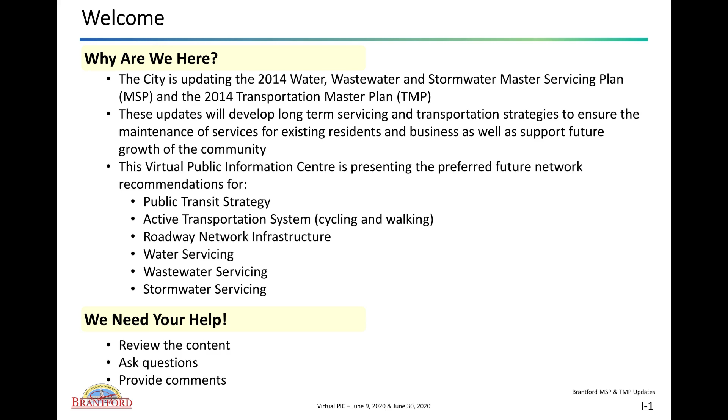The goal of the MSP is to develop a long-term servicing strategy for the City's water, wastewater, and stormwater infrastructure. The servicing strategies have been developed to ensure the maintenance of services for existing users and to support future growth. In response to the advice of public health officials to limit in-person gatherings due to COVID-19, this virtual PIC has been developed. Through this virtual PIC, you will be able to learn more about the Master Servicing Plan's preliminary preferred strategy for the water, wastewater, and stormwater infrastructure, and to provide comments on the Master Servicing Plan findings.

This presentation is the first in many steps of the virtual PIC process. The public is invited to submit questions to be answered by the Master Servicing Plan team. Questions submitted before the June 23rd deadline will be answered in a question and answer video posted on June 30th. Questions asked after June 23rd but before July 21st will be answered through a frequently asked questions document.

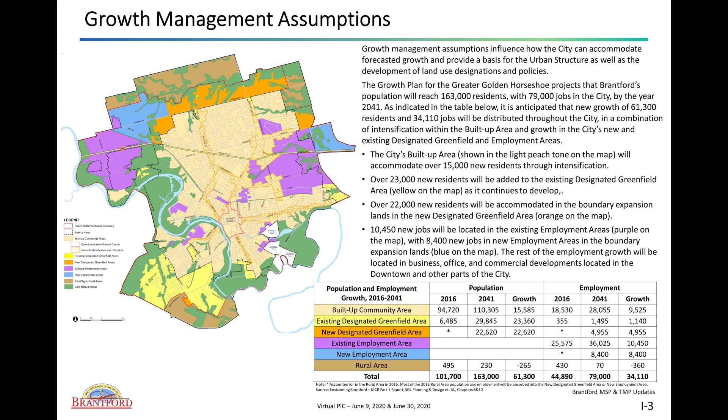The Master Servicing Strategy has been developed to ensure the maintenance of services for existing users as well as to support future growth. For the 2019 MSP, the servicing strategy focuses on supporting growth out to 2041. The Master Servicing Plan's population and employment projections are based on the City's official plan, which designates population and employment forecasts for new urban land uses and internal growth areas. The City's population is anticipated to grow by 61,300 people by 2041, for a total population of 163,000, while the City's employment is anticipated to grow by 34,110 jobs by 2041 for a total employment of 79,000.

The Master Servicing Plan update sets out to meet the requirements of the Municipal Engineers Association, or MEA, Class Environmental Assessment process, which involves the completion of Phase 1 and Phase 2 of the Class EA process for master plans. Phase 1 of the process focuses on identifying the problem and opportunities, and Phase 2 involves the identification and evaluation of alternative solutions. We are currently in the second phase.

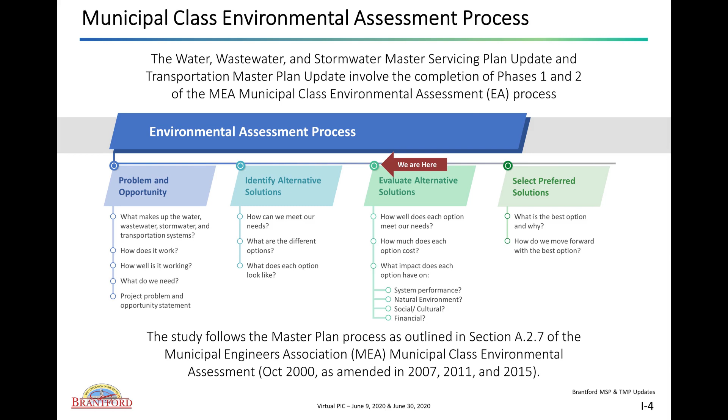Under Step 2, all servicing concepts that were carried forward were further developed into more detailed servicing alternatives. These alternatives were then evaluated using 4 major evaluation factors, including technical, environmental, social-cultural, and financial. Under each major evaluation factor, multiple criteria, as presented on the next slide, were reviewed and scored either high, shown as green, representing the most favorable conditions, medium, shown as orange, or low, shown as red, representing the least favorable conditions. Once all alternatives were evaluated, the preliminary preferred alternative was identified using the reasoned argument approach.

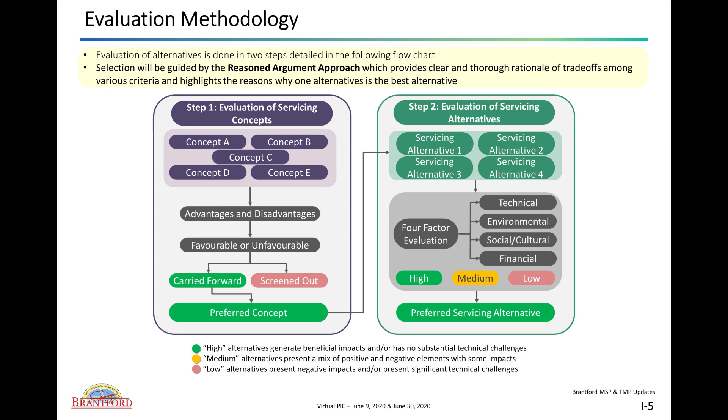The reasoned argument approach does not use an overall numeric scoring system, but focuses on identifying clear and thorough rationale of trade-offs among alternatives based on each alternative's anticipated impacts and benefits. The basis of this approach is to qualitatively evaluate the relative advantages, disadvantages, impacts, and benefits of each alternative.

As mentioned on the previous slide, each servicing alternative was subject to a four factor evaluation, which included technical factors, environmental factors, social-cultural factors, and financial factors. Under the environmental factors, the following criteria were considered: protects environmental features, protects wildlife and species at risk, minimizes climate change impacts. Under the financial factors, the following criteria were considered: capital and life cycle cost, operational and maintenance costs, aligns with approval and permitting process.

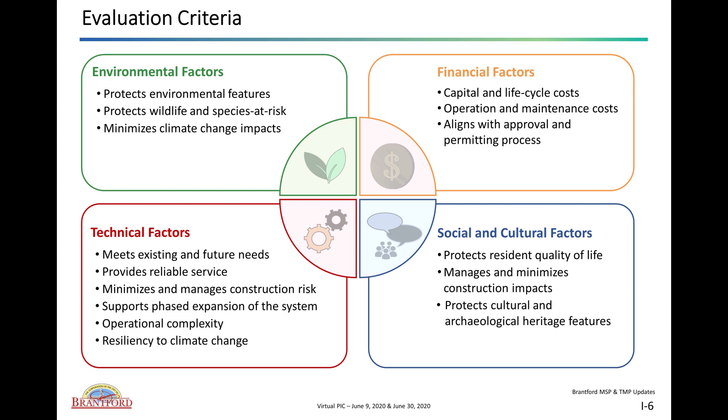Under the technical factors, the following criteria were considered: meets existing and future needs, provides reliable services, minimizes and manages construction risk, supports phased expansion of the system, operational complexity, and resiliency to climate change. Under social and cultural factors, the following criteria were considered: protects residents' quality of life, manages and minimizes construction impact, protects cultural and archaeological heritage features.

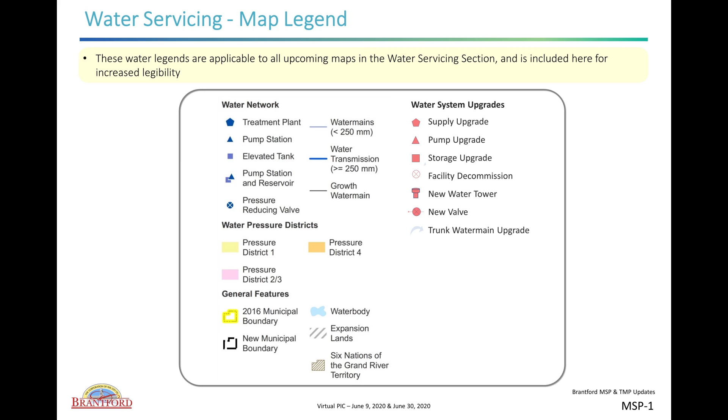Water for the city is supplied by the city's Holmedale water treatment plant, which receives and treats water from the Grand River. The city's water system is organized into 3 pressure districts: Pressure District 1, which generally includes the city's southwest, including the downtown area, Pressure District 2-3, which generally includes the city's east, and Pressure District 4, which generally includes the city's northwest.

Also shown on the figure are the future water service areas, which include the city's expansion lands to the north and east, and Tutela to the southwest. The Tutela area does have existing water servicing, but the system is currently connected to the County of Brant's Mount Pleasant water system. In the future, the Tutela water system will be connected to the City of Brantford's water system.

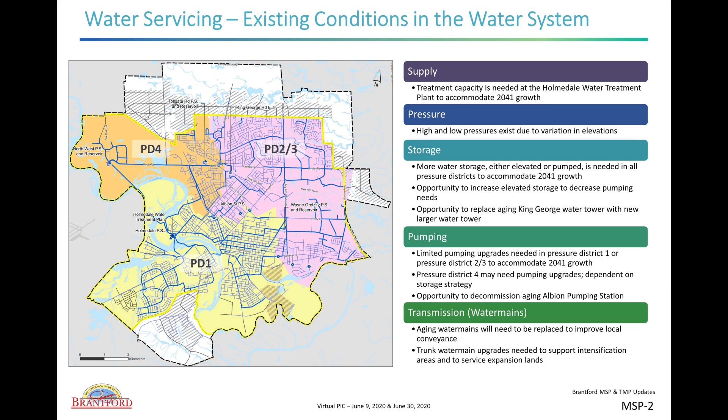To develop the water servicing concept and the preliminary preferred solution, a review of the existing water system was conducted to determine existing and future needs. This review identified supply, storage, pumping, transmission, and pressure opportunities and constraints. Key considerations include water treatment capacity to accommodate growth needs, water system pumping and storage capacity to accommodate growth needs, water main transmission capacity to support system pressure and flows, and extending of water servicing to expansion lands.

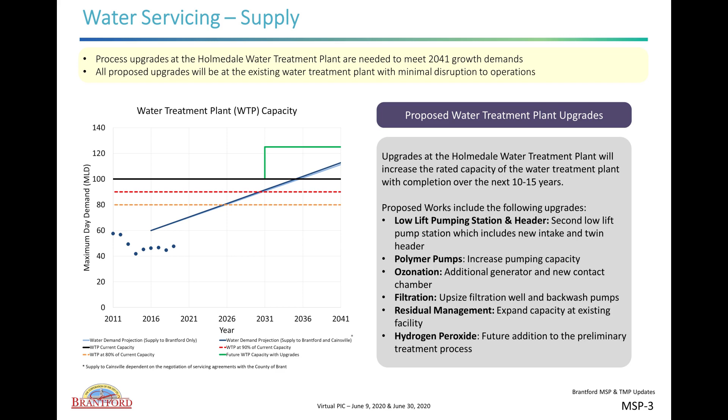Based on these capacity triggers, the treatment plant upgrade process will need to commence by 2025 with upgrades being completed by 2031. Water treatment plant upgrades are expected to consist primarily of optimization of major facility processes and expansion of minor and limiting processes. All the required upgrades will be completed within the existing property.

4 pressure district servicing concepts were presented at the previous PIC. Concept 1, shown on the far left, involves maintaining the current system pressure district boundaries. This concept was carried forward as it is easy to implement and potentially minimizes facility upgrade needs. Concept 2, shown second to the left, consists of splitting the existing Pressure District 2-3 into 2 new pressure districts, with the goal of improving system pressures and optimizing facility needs. This concept was screened out as it would be too difficult to implement and may complicate system operations unless additional new facilities are also constructed.

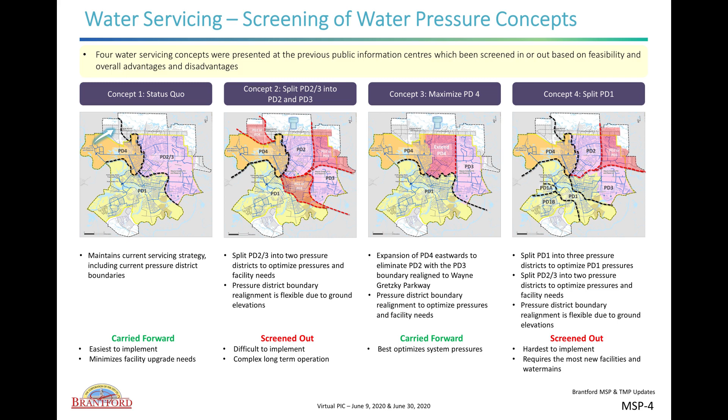Concept 3, shown second to the right, involves the expansion of Pressure District 4 eastwards to eliminate the existing Pressure District 2 and realign Pressure District 3. This concept was carried forward as it optimizes system pressures. Concept 4, shown on the far right, consists of a substantial reconfiguration of the existing pressure district boundaries with the objective of improving system pressures overall. This concept was screened out as it requires the most new facilities and water mains and is the hardest to implement. 2 pressure district boundary alternatives were carried forward and further evaluated.

Alternative 1, shown on the left, generally maintains the existing water system configuration and pressure district boundaries. Under this alternative, storage increases are needed to all 3 pressure districts to support growth needs. Further, pump station capacity increases are needed to support growth in Pressure District 2-3 and potentially in Pressure District 4.

Under Alternative 1, the Pressure District 2-3 storage needs provide an opportunity to decommission the existing King George tank and to construct a new elevated tower, allowing for the optimization of Pressure District 2-3's pressures and pump station operations. The location of the new elevated tower is shown conceptually on the figure to the left. However, the tower's final location will be determined through a future Schedule B environmental assessment.

Additionally, under Alternative 1, the Pressure District 2-3 pumping needs provide an opportunity to optimize the configuration and operation of the existing Wayne Gretzky and Tollgate pumping stations and allow for the decommissioning of the existing Albion pump station. Pump station upgrades are expected to be contained within the existing properties. The Pressure District 4 pumping upgrade needs and the Pressure District 1 storage needs are dependent on the preferred Pressure District 2-3 and Pressure District 4 storage strategies and are further reviewed and discussed on later slides.

Alternative 3, as shown on the right, consists of maximizing Pressure District 4 service area, with Pressure District 4 being extended eastwards to Wayne Gretzky, generally incorporating the limits of Pressure District 2. Under this alternative, the Wayne Gretzky, Tollgate, and Northwest pumping stations will all require upgrades to accommodate the new system configuration, and the Albion pump station and King George tank will be decommissioned.

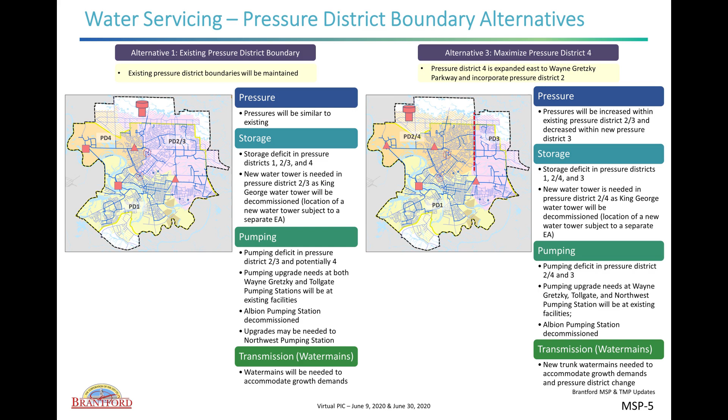Further, a new water tower will be needed to support Pressure District 2-4. The location of the new water tower is shown conceptually on the figure to the right, and the elevated tower's location will be determined through a future Schedule B environmental assessment. However, the water tower is anticipated to be located within Northwest employment lands. Further, the Pressure District 3 storage upgrade needs and the Pressure District 1 storage needs are dependent on the preferred Pressure District 4 storage strategy.

Alternative 1's key advantage is its simplified implementation process, allowing for phased expansion. Alternative 3 did have the advantage of generally improving system pressures. However, Alternative 3 is disadvantaged due to more complex implementation needs and does not support the phased expansion of the system, requiring many of the similar upgrade projects to be completed earlier than as compared to Alternative 1. Both alternatives have similar challenges related to land acquisition needs for the new water tower sites.

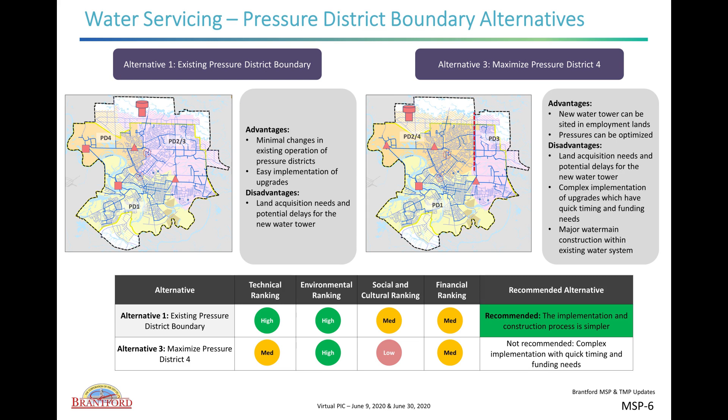Based on the preliminary preferred water pressure district boundaries, two water storage strategies were identified to address Pressure District 1 growth needs. Alternative 1, shown on the left, would consist of constructing a new ground-level reservoir at the Holmedale water treatment plant. Alternative 2, shown on the right, would consist of enlarging the new Pressure District 2-3 elevated tank to accommodate the additional Pressure District 1 needs, and to facilitate the future transfer of water from Pressure District 2-3 to Pressure District 1 through improved zone boundaries.

Alternative 2 provides the greatest flexibility in phasing of future expansion projects. The new Pressure District 2-3 elevated tank will need to consider future servicing needs for the remaining lands within the city's municipal boundary. This would trigger the need to design and construct the new elevated tower to support these post-2041 needs due to the tower's 50 to 100 year expected life. By leveraging the surplus elevated tank volume to support Pressure District 1 supply needs in the interim, there is the opportunity to defer Pressure District 1 reservoir needs until 2041.

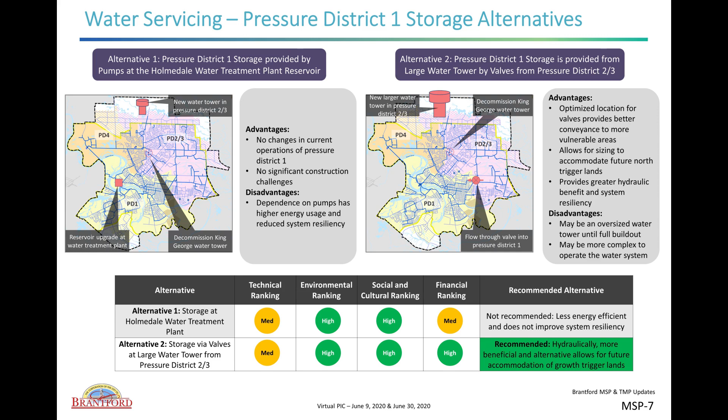Alternatives 1 and 2 had similar rankings under the technical, environmental, and social cultural factors, while Alternative 2 had a better financial ranking as high or favorable as compared to Alternative 1's medium rank. Alternative 2 has been recommended as the preliminary preferred alternative based on its flexibility to support future servicing of the North Trigger lands.

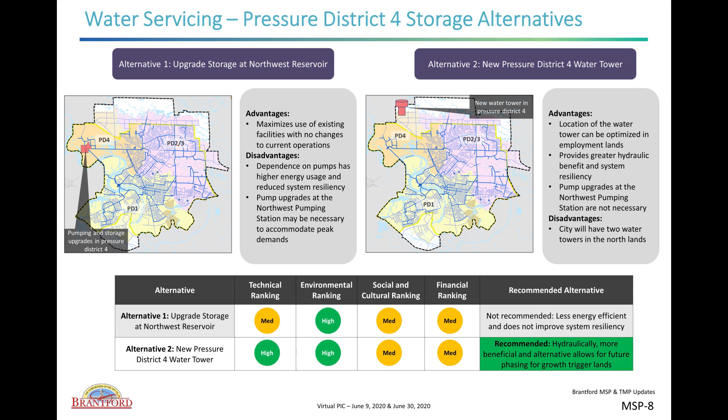In addition to the major facility upgrades presented on the preliminary preferred servicing strategy, local water system improvements have also been identified. As shown on the figure to the left, the remaining lands on the western boundary of the city, south of Colborne Street, are characterized by high ground elevations that exceed the service range of the existing Pressure District 1. As such, future servicing of these lands will require the construction of a new Colborne Street West pumping station. The pump station is anticipated to be a developer-led initiative constructed to service the new development lands. However, there is an opportunity to integrate some existing properties on Colborne Street West into the new pressure district to address existing low service pressures.

As shown in the middle figure, the new employment lands to the east of Garden Avenue are characterized by low ground elevations that are outside the service range of the existing Pressure District 2-3. As such, the servicing of these lands will require the development of a new sub-pressure district to avoid high pressures. Further, a new water main along Garden Avenue is needed to support future peak demands.

As shown on the figure to the right, the existing Strawberry Hill area is subject to pressures just above the city's minimum requirements. Future development within this area will likely trigger the need for the construction of a new pump station. It is anticipated that the pump station would only be triggered by development and would be a developer-led initiative. Any pump station would need to be sized to accommodate both new and existing properties.

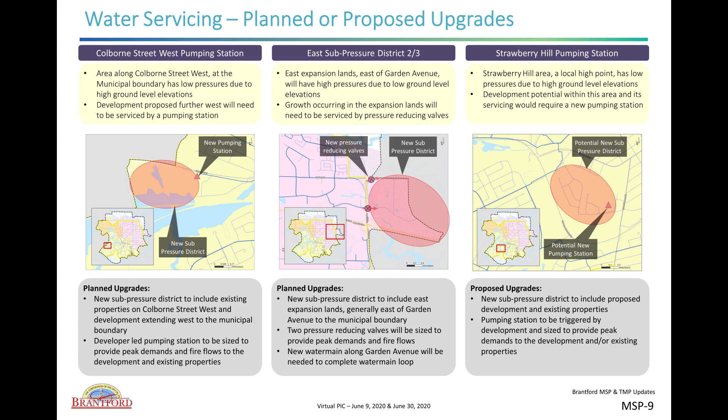Additionally, trunk water main upgrades are needed to support transmission of water to major growth areas, and local water main upgrades are needed to support local pressure and fire flow needs. To support existing and growth needs, the following trunk water main upgrades have been identified.

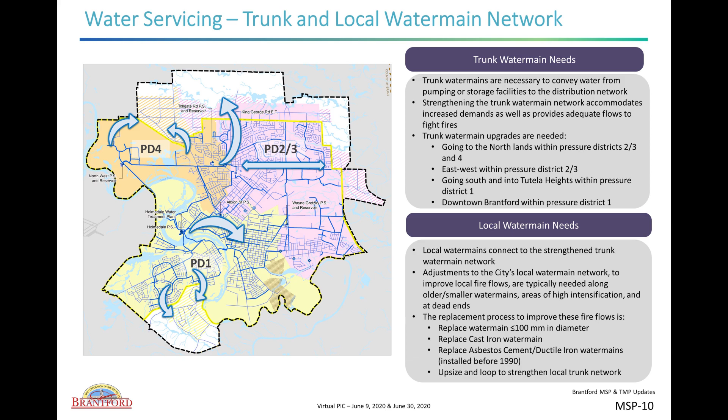New mains supporting the north expansion lands, including Pressure District 4 trunks along Oak Park and Paris Road, Pressure District 2-3 trunk along King George, a new Pressure District 2-3 east-west trunk along Fairview Drive and Lynden Road, new trunks to Tutela along Mount Pleasant and Conklin Road, and new downtown Brantford trunk. Local water main upgrades to improve local pressures and fire flows will focus on leveraging the city's ongoing water main replacement program.

This slide shows the preliminary preferred water strategy to service growth to 2041. Several separate water servicing components are recommended that collectively make up the overall preferred strategy. The main components are as follows. Increased treatment capacity at the Holmedale water treatment plant. New water tower in Pressure District 2-3 to accommodate storage deficiencies in both Pressure District 2-3 and Pressure District 1. New water tower in Pressure District 4. Upgrades at Wayne Gretzky and Tollgate Pump Station within Pressure District 2-3.

Upgrade trunk water mains in Pressure District 1 to Tutela and the downtown. Upgrade water mains north to expansion lands along King George Road, and upgrade water mains east-west along Lynden Road and Fairview Drive in Pressure District 2-3. Upgrade water mains north to expansion lands along Oak Park and Paris Road in Pressure District 4. Decommissioning of the existing King George Tank and Albion Pump Station.

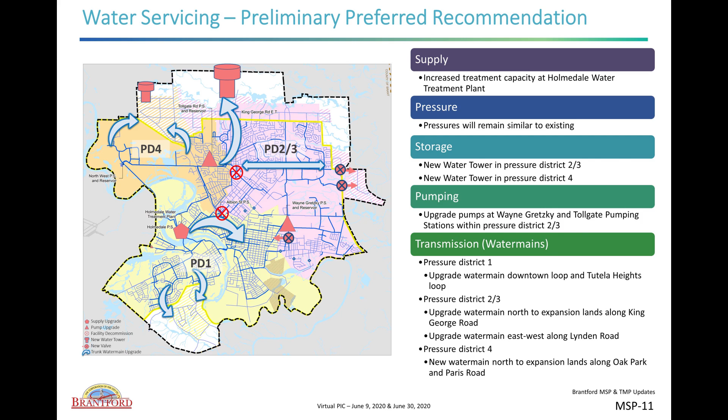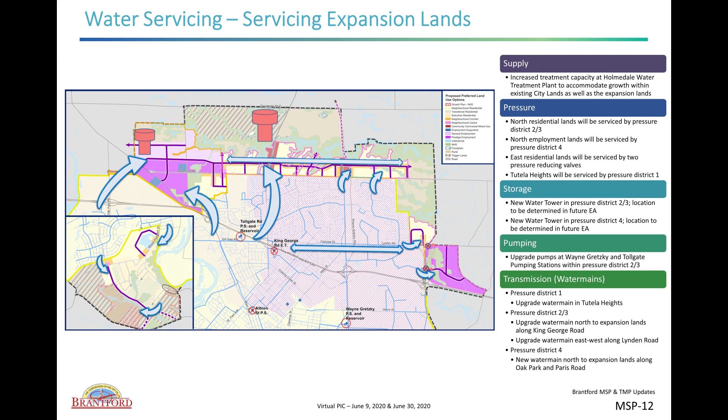This slide shows the preliminary preferred water servicing strategy for the expansion lands, which has been presented at previous PICs. In general, the expansion lands will integrate directly into the city's water system. This strategy is further outlined in the previous water slides. The wastewater servicing alternatives presented in the following section include maps that highlight the alternative strategies. Pictured in this slide is the legend for the wastewater servicing maps, which is applicable to all upcoming wastewater maps.

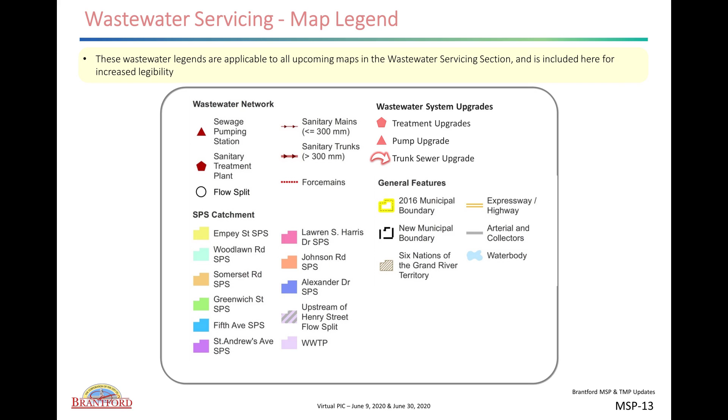To develop servicing concepts and the ultimate solutions, a review of the existing wastewater system was conducted to determine existing and future needs. This review identified the treatment, pumping, and transmission components. Key considerations included wastewater treatment capacity to accommodate growth, wastewater pumping capacity to accommodate growth, wastewater transmission capacity to support system flows, and extending the wastewater servicing to expansion lands.

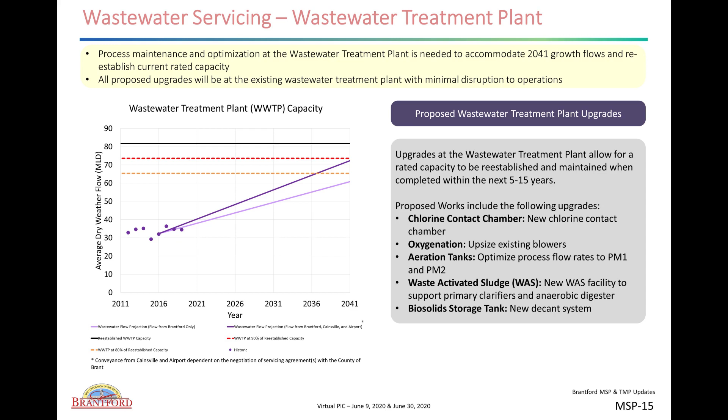However, a detailed review of the wastewater treatment plant processes identified the need to upgrade and optimize individual process elements to reestablish and maintain the treatment plant's rated capacity. These upgrades will be completed at the existing property over the next 5 to 15 years. A review of the existing and future wastewater system performance identified major wastewater servicing needs in 4 areas. Each of these areas is discussed further in the following slides.

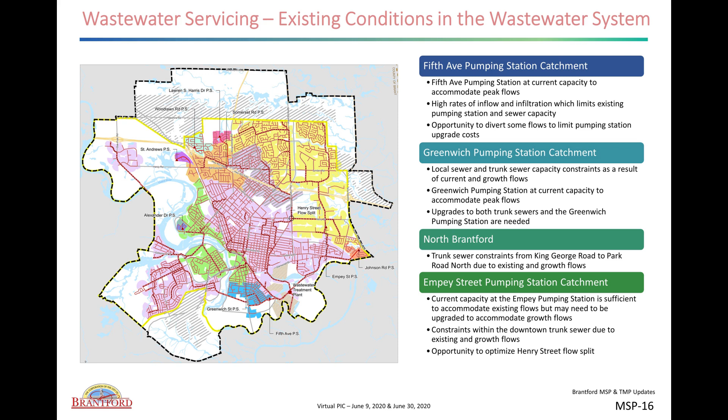Servicing concepts for each of the 4 wastewater need areas were presented at the previous PIC. For the 5th Avenue pumping station, as shown on the far left, 2 concepts were presented consisting of diverting upstream flows away from the pump station and undertaking pump station upgrades. These options were explored further under a separate assignment, and the city is in the process of designing the pump station upgrades. For each of the 3 remaining areas, all presented concepts were carried forward for further evaluation and are discussed in the following slides.

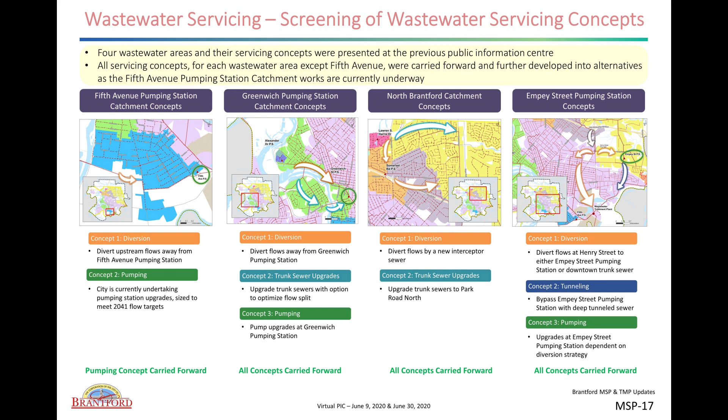2 wastewater alternatives for the Greenwich Street pump station area were carried forward and further evaluated. The Greenwich Street pump station catchment has an internal flow split, where flows from the upstream catchment are split at the Jubilee siphon. Currently, the majority of flows are being conveyed across the Grand River to Catherine Ave, while the remaining flows continue along Grand River Ave.

Under the current flow split configuration, there are existing and future capacity constraints in the Catherine Avenue sewer and downstream trunk sewer immediately upstream of the station. Further, the existing sewer on Grand River is operating near capacity. Additionally, upgrades to the Greenwich pumping station are needed to support growth.

Alternative 1, shown on the left, consists of diverting more flows to the Grand River Avenue sewer. Under this alternative, capacity constraints in the Catherine Avenue system are addressed. However, this does trigger upgrades to the Grand River Avenue sewer. Alternative 2, shown on the right, maintains the existing flow splits at the Jubilee siphon, and upgrades are completed to the downstream sewers. In both alternatives, upgrades at the existing Greenwich pump station are undertaken to address growth capacity needs.

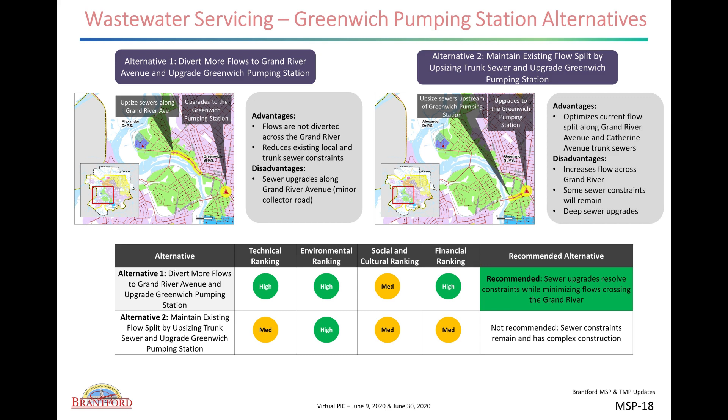Alternative 1 better addresses system capacity issues with the combined diversion and Grand River sewer upgrades addressing both the Catherine Ave and Grand River Ave capacity restrictions. Further, Alternative 1 reduces the total wastewater flows needing to cross under the Grand River and helps to reduce overall risk at the siphon. Alternatives 1 and 2 had similar rankings for environmental and social cultural factors, while Alternative 1 had better technical and financial rankings. Alternative 1 has been recommended as the preliminary preferred alternative based on Alternative 1's capacity to better address the technical needs.

Two wastewater alternatives for the North Brantford sewer area were carried forward and further evaluated. Flows from the King George intensification corridor are currently collected through several small gravity sewers that flow west to east, ultimately discharging into the Park Road trunk sewer. Growth along King George is expected to trigger upgrade needs to one or more of these existing sewers.

Alternative 1, shown on the left, consists of developing a new trunk sewer to service the King George area and would consist of a new trunk sewer along King George to Fairview Drive and down Fairview Drive to Baxter Road. Under this alternative, there is an option to upsize the sewer to allow for a portion of the north expansion lands to discharge to this new trunk sewer. Alternative 2, shown on the right, maintains the existing sewer network and consists of localized sewer upgrades.

Alternative 1 does present a substantial opportunity to increase phasing flexibility for the north expansion lands. However, the alternative's new trunk sewer is significantly longer than the Alternative 2 upgrade needs and requires a very deep sewer construction, which increases the alternative's cost and construction complexity. Alternatives 1 and 2 have similar technical and environmental rankings, while Alternative 2 has a better social, cultural, and financial ranking. Alternative 2 has been recommended as the preliminary preferred alternative based on Alternative 2's lower cost and construction impacts.

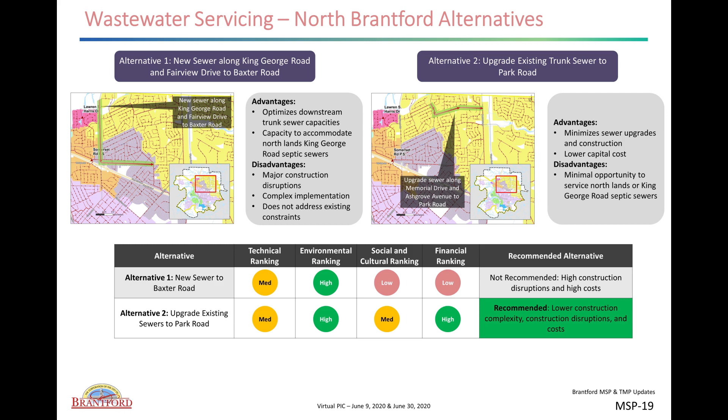4 wastewater alternatives for the Empey pump station were carried forward and further evaluated. Growth flows are expected to exceed the capacity of the existing pump station. Further, upstream of the Empey pump station, there is a flow split at Wayne Gretzky and Henry Street. Currently, the majority of these flows are diverted away from the Empey pump station and directed to the gravity sewer through the Arrowdale Golf Course. Under current conditions, the Arrowdale trunk sewer is operating near capacity, and growth flows are expected to trigger capacity upgrades along a substantial portion of the downstream sewer. The sewer connecting the flow split to the Empey pump station has capacity to accommodate additional flows.

Alternative 1A, shown on the far left, consists of maintaining the existing sewer configuration and upgrading the downstream sewer and the Empey pumping station. Alternative 1B, shown second to the left, consists of maintaining the existing flow split but including the construction of a new trunk sewer from Henry Street to Mohawk Street. Alternative 2, shown second to the right, consists of reconfiguring the flow split to redirect more flows to the Empey pump station with the goal of diverting sufficient flows to eliminate the need for downstream sewer upgrades. Further, under this alternative, a new deep tunneled sewer would be constructed from Empey to Mohawk Street to allow for the decommissioning of the Empey pump station.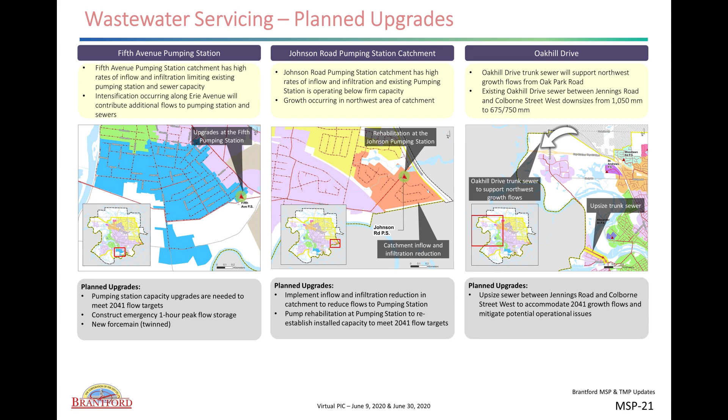As shown in the middle, the Johnson Road pump station catchment is also subject to high inflow and infiltration rates. To meet the 2041 flow targets, the city will be implementing an inflow and infiltration reduction program to manage peak flows to the station. As well, the city will be rehabilitating the pump station to re-establish the station's installed capacity. As shown on the figure to the right, the Oakhill Drive trunk sewer, which supports northwest expansion land growth flows, will require upgrading to meet the 2041 growth flows.

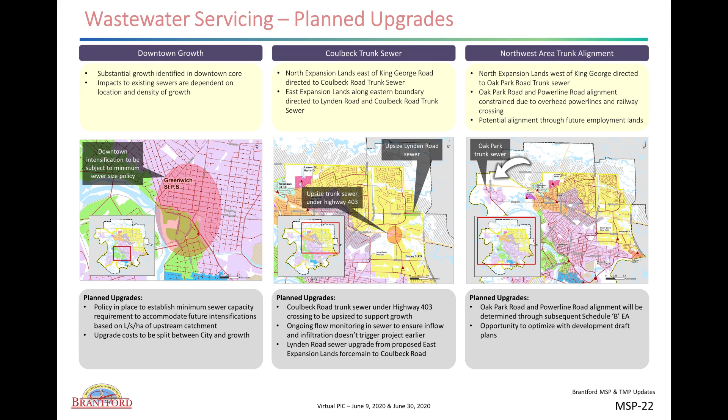As shown on the figure to the right, the north expansion lands west of King George will be directed to the existing Oak Park trunk sewer. The alignment of the trunk sewer from Powerline Road to the existing sewer will be determined through a subsequent Schedule B EA following the completion of the MSP.

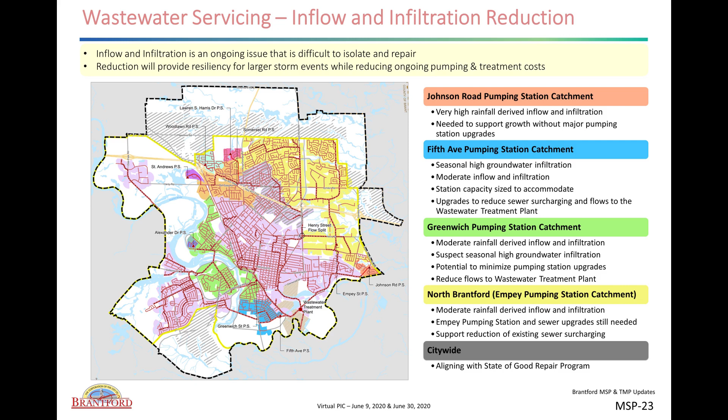Through past investigations, the city has identified areas within the city that are subject to higher than desired rates of inflow and infiltration entering the wastewater collection system. This issue is not unique to the city of Brantford, but is a common issue across Ontario. In addition to the upgrades identified within the preliminary preferred wastewater servicing strategy, the city will undertake a targeted inflow and infiltration reduction program. This program will be developed in an effort to prioritize areas with high rates of inflow and infiltration or areas with existing sewer capacity restrictions. Where feasible, the city will coordinate this work with the ongoing sewer replacement program.

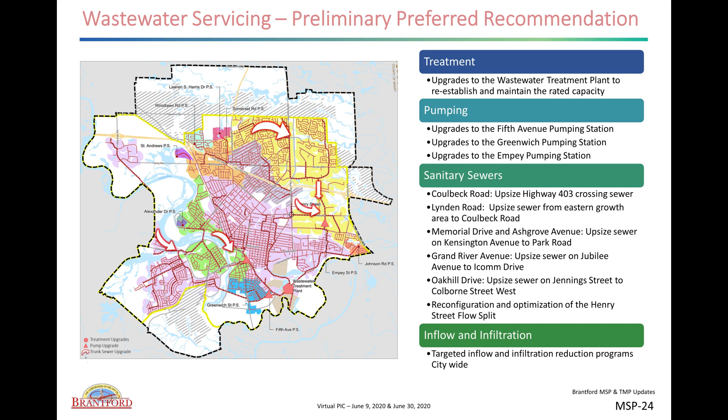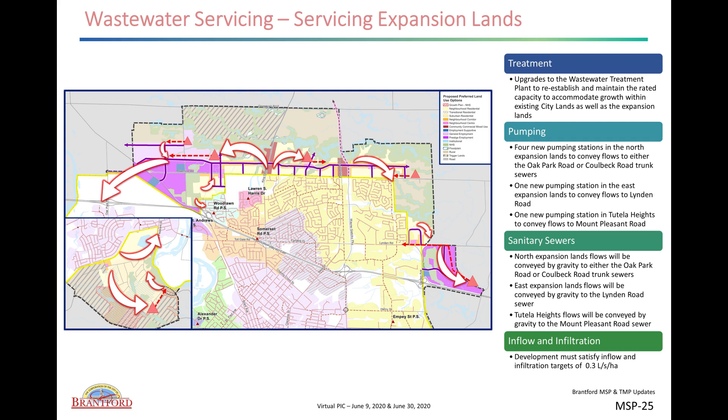This slide shows the preliminary preferred wastewater servicing strategy for the expansion lands and has been presented at previous PICs. In general, the expansion lands will integrate directly into the city's wastewater system at 5 key connection points. The Oak Park trunk sewer, that will service the majority of the lands west of King George. The Coulbeck trunk sewer, which will service the remaining growth lands east of King George. The Lynden Road sewers, which will service the east expansion lands. And the Mount Pleasant Road sewer, which will service Tutela. And the Woodlawn pump station, which will provide limited servicing to the directly adjacent lands.

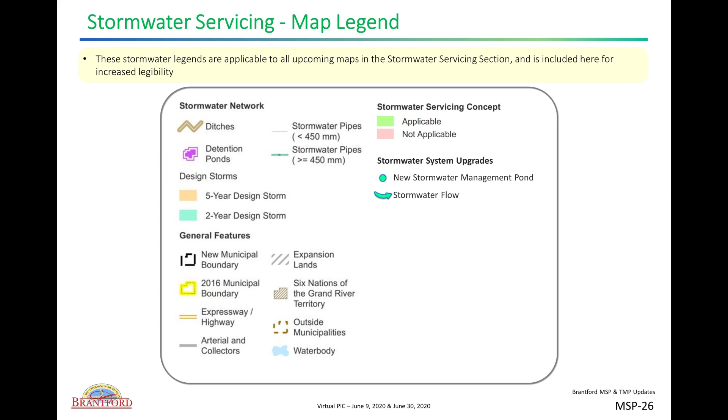The city's stormwater system is composed of many parts. These include the minor drainage system, typically the local sewer network that is designed to capture and convey the more frequent storm events. The major drainage system, typically the roadway, ditches, and drainage channels that are designed to capture and manage flows that exceed the capacity of the local minor system.

Stormwater management facilities that are used to provide water quality treatment of stormwater flows and to reduce peak flows entering the downstream system. And the dike network that is used to protect the city during periods of high Grand River flows. When developing stormwater servicing concepts, a review of the existing stormwater system was conducted to determine existing and future needs. Key considerations include the age, condition, and performance of the city's existing stormwater infrastructure.

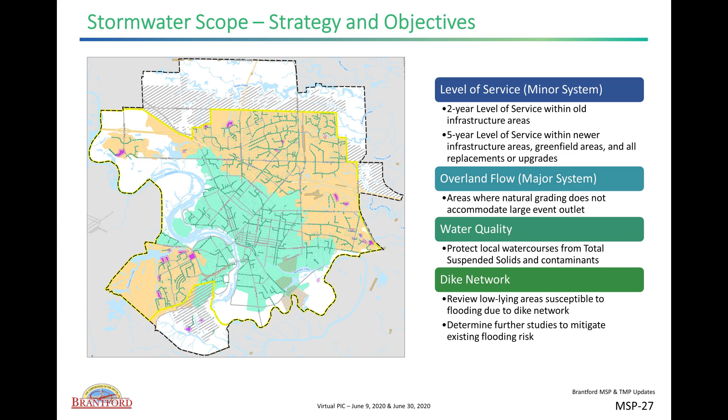A review of the minor system performance would indicate that the older portions of the system were designed to meet a 2-year design flow, shown in green, while the newer portions of the system were designed to meet a 5-year design flow, shown in orange. These existing performance levels were taken into account when assessing system needs.

The following stormwater servicing concepts were presented at previous PICs. These stormwater servicing concepts include status quo, applicable to areas where there are no known or observed issues and do not require upgrades. Minor system upgrades, consisting of pipe upgrades or diversions, which may be applicable to areas where there are known issues within the minor system. Quantity control, such as a pond, which will store stormwater and release it slowly to ensure the pipe network or receiving outlets are not overwhelmed from peak flow rates.

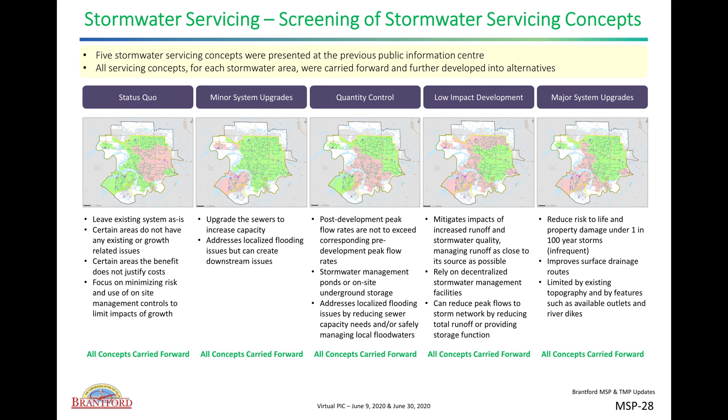Low-impact development strategies consisting of decentralized methods to manage runoff quantity, peak flow, and quality. Major system, applicable to areas where the major system does not adequately direct runoff to an outlet when the minor system is at capacity for large storm events. When reviewing the entire system, areas in green represent areas where the proposed servicing concept is applicable or possible, and areas in red show areas where the servicing concept is not applicable.

The city benefits from a significant amount of historical water and wastewater system condition and performance information. As such, this allows the city to proceed directly into the implementation of the MSP recommendations as they relate to the water and wastewater system. However, the city's historic stormwater information is less robust. Although the city continues to improve its stormwater system understanding, it is understood that additional investigations and studies are needed before the city can proceed with the implementation of stormwater upgrades.

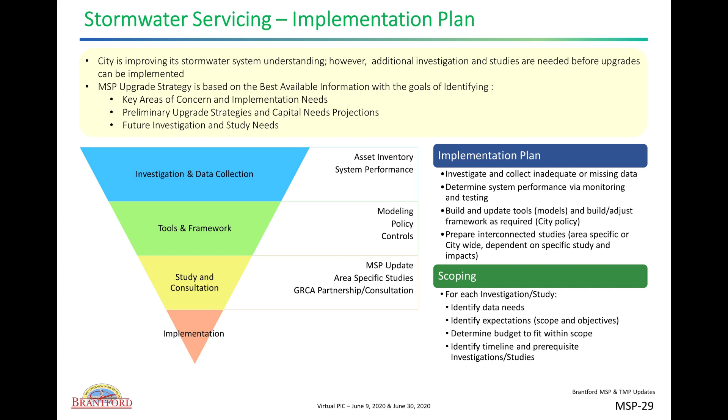As such, the stormwater strategy outlined in the MSP will be developed to a lesser degree than the wastewater and water systems. The MSP upgrade strategy is based on the best available information with the goals of identifying key areas of concern and implementation needs, preliminary upgrade strategies and capital needs projections, and future investigation and study needs. Key to the future successful management of the stormwater system is the development of an implementation plan that outlines a pathway to collect background and historical information relating to the stormwater system. With this more complete information, more accurate tools and frameworks can be developed as the basis of future planning studies.

The first stormwater priority area consists of the Grand River Holmedale subcatchment. In this area, trunk sewer restrictions along St. Paul Avenue and Albion Street, as well as pockets of local flooding and surcharging infrastructure have been identified. Two potential servicing alternatives were identified. Alternative 1, shown on the left, proposes diverting stormwater flows at Lawrence Street south to the St. Paul's Avenue storm sewer, freeing up capacity within the existing Albion Street trunk sewer. Alternative 2, shown on the right, proposes upgrading the sewer along the existing alignment.

Alternative 1 requires complex construction beneath the railway and is more expensive, whereas Alternative 2 along Albion Street causes minimal disruption to the major traffic corridor. These factors result in Alternative 2 having a lower overall cost and technical complexity. Alternative 2 has higher favorable ranking under all factors, whereas Alternative 1 has 3 factors with a medium ranking. As such, Alternative 2 has been recommended as the preliminary preferred alternative.

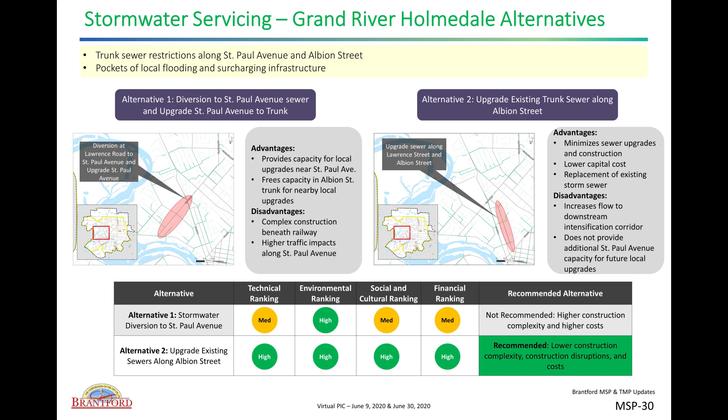The next stormwater priority area consists of the Eagle Place subcatchment. In this area, sewer restrictions within 7th Avenue and Sanderson Street have been identified. Two potential servicing alternatives were identified. Alternative 1, shown on the left, consists of redirecting storm sewers to the west along 7th Avenue to free up capacity within the downstream 7th Avenue and Sanderson Street sewer. Alternative 2, shown to the right, consists of upgrades to the existing infrastructure.

Both alternative solutions do not present significant technical complications. However, Alternative 1 has a lower implementation cost, and Alternative 2 has possible environmental concerns as the additional flow rate from the currently undersized pipe system may cause outlet concerns within the ditch channel conveying stormwater flows from the pipe network to the Grand River.

Alternative 1 has a high favorable ranking under all factors, while Alternative 2 has a medium financial ranking. As a result, Alternative 1 has been recommended as the preliminary preferred alternative.

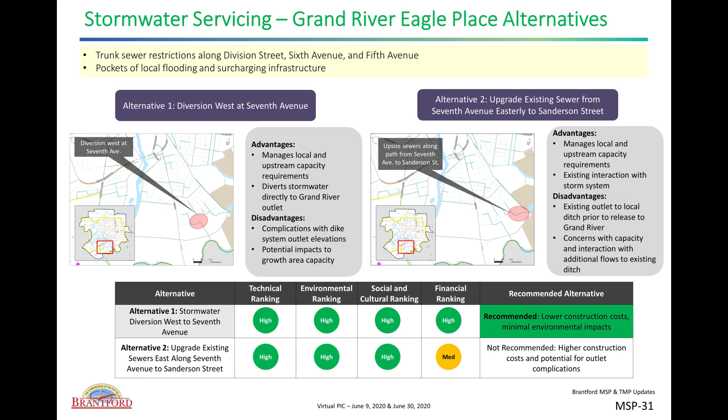The next stormwater priority area consists of the Grand River Northwest subcatchment, an area of future greenfield development north of Highway 403. Two potential servicing alternatives were identified. Alternative 1, shown on the left, splits both flows east and west at Oak Park Road, with stormwater from the west of Oak Park Road conveyed towards the Grand River and stormwater from lands east of Oak Park Road conveyed south to the 403. Alternative 2, shown on the right, directs all flows to the west.

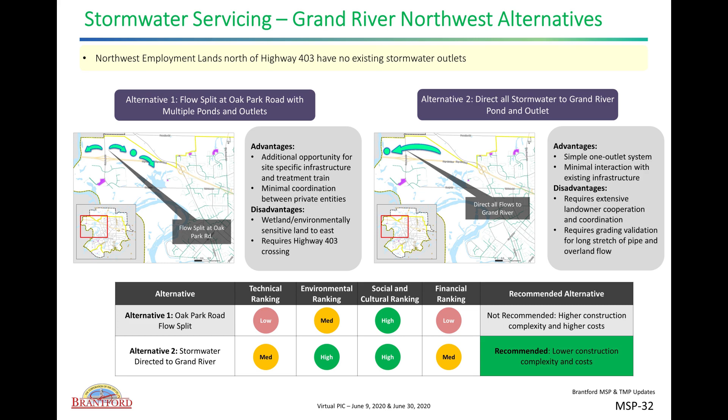Alternative 1 is noted as having implementation and construction risks related to crossing the Highway 403 corridor. Alternative 2 has high, favorable, or medium rankings under all factors, while Alternative 1 has low, unfavorable technical and financial rankings. As a result, Alternative 2 has been recommended as the preliminary preferred alternative. However, the selected alternative will ultimately require cooperation with the development to ensure grading is possible.

The next stormwater priority area consists of the Fairchild Creek Garden subcatchment. In this area, portions of stormwater north and south of Highway 403 are directed to the Highway 403 drainage infrastructure. The initial assessments indicate that the Highway 403 drainage infrastructure may be undersized and causing flooding in the upstream city system. Three potential servicing strategies were identified. Alternative 1, shown on the left, would redirect flows north of 403 along a new trunk sewer along Fairview Drive. This requires the reconfiguration of local stormwater infrastructure.

Alternative 2, shown in the middle, includes upgrading the drainage infrastructure within the 403 corridor. However, this alternative requires significant coordination with the MTO and may not be technically or financially viable or may present implementation issues due to the ownership and approval requirements. Alternative 3, shown on the right, would divert flows south of Highway 403 along Morton Avenue. However, this alternative does not address all capacity needs. As such, Alternative 3 was not considered further.

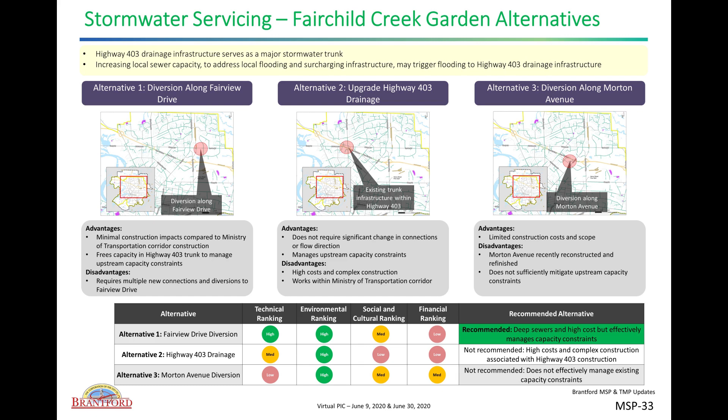Alternative 1 generally ranks higher on all categories as compared to Alternative 2. As such, Alternative 1 has been recommended as the preliminary preferred alternative. However, consultation with the MTO is recommended to further explore the viability of Alternative 2.

In addition to the major priority areas, the following local stormwater system improvements have been identified. As shown on the figure to the left, local sewer restrictions have been identified in the Mohawk Lake subcatchment. The local area trunk sewers have sufficient capacity. As such, any upgrades would be limited to local sewer upgrades. We note the area is also a good candidate to implement LIDs in intensification areas to further treat water quality and reduce peak flow rates.

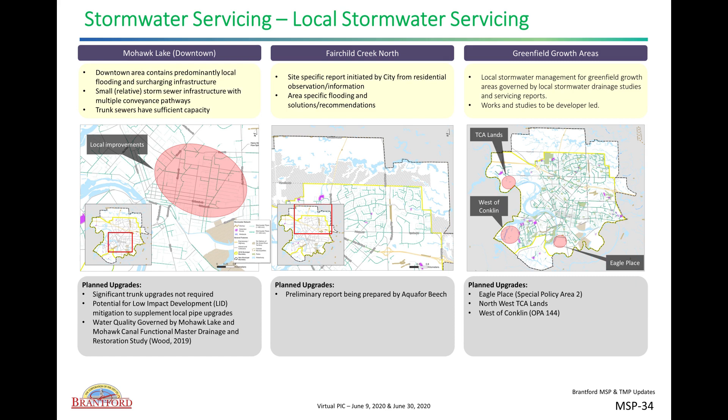Shown in the middle, the city is currently undertaking a detailed investigation to address local residential complaints in the Fairchild Creek North area. The recommendations of that study are being prepared under a separate assignment and will be incorporated into the results of this master servicing plan. Shown on the figure to the right, there are several greenfield growth areas across the city. The city is working with local developers to implement local stormwater management plans.

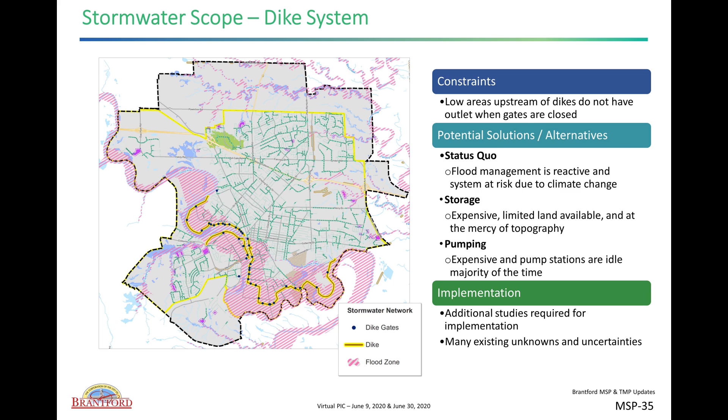A further stormwater system consideration are the dikes along the Grand River. These dikes are managed by the Grand River Conservation Authority and protect the city against flooding during high Grand River levels. However, they can also impact local drainage needs by increasing the risk of minor system flooding when the dike outlets are closed, or restrict the capacity of the major system flows to outlet due to outlet restrictions. The city has identified the need to review these issues in greater detail under a separate study.

Water quality will be of concern in the expansion lands. The MECP enhanced removal of 80% total suspended solids is the requirement for all new expansion land developments. Multiple subcatchments outlet to cold water creeks and require thermal mitigation. Erosion control will also be required.